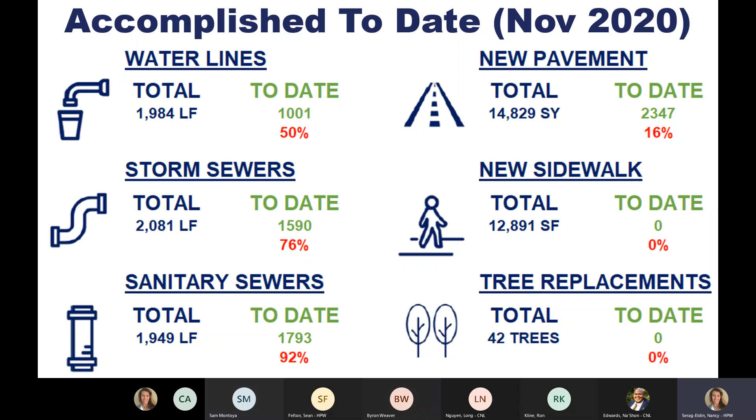As of today, this is what has been accomplished for the 6 major components of this project. 50% of the water line has been installed, 76% of the storm sewer and storm inlet leads have been installed, 92% of the sanitary sewer and sanitary service leads have been completed, and 16% of the new roadway pavement has also been installed.

In terms of payment data, the work completed to date is approximately $2,451,000, which is approximately 42% of the original budget. In terms of time use data, today is day 105, which is 23% of the original contract time. So this project is quite ahead of schedule, which is great.

We've also approved 2 change orders so far, so the budget has increased a little bit. It's now $5,901,000 and some change. And we've added 2 additional days to the contract time, for a total of 452 days.

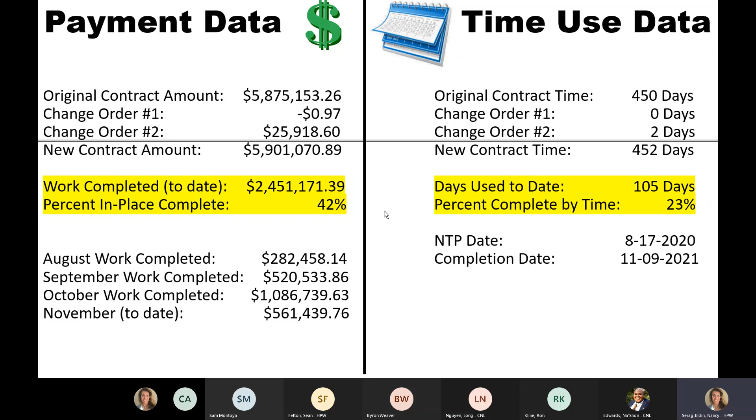So these are the action items from our previous progress meeting. There's just 2 items that I wanted to double check with Sean and Sam. Sean, for action item number 3, are there any updates regarding the sanitary sewer blockage that was on South Wilcrest?

No. I got in touch with the lady from the city, but she never got in touch with me. But Oscar had somebody come out and do some cleaning on his own, specialized maintenance. But that's all that's been done. Okay, thank you for that. Got it, all right.

And then with regards to item number 5, Sam, do you have a rough estimate of when the subcontractors and vendors can resubmit these 5 submittals? Yes, I spoke with Reliable Signal this morning, and they plan to submit by the end of next week. I'm looking at submittal number 49 to recall which one that is, right quick... Okay, that's the same people, and that should submit by the end of next week.

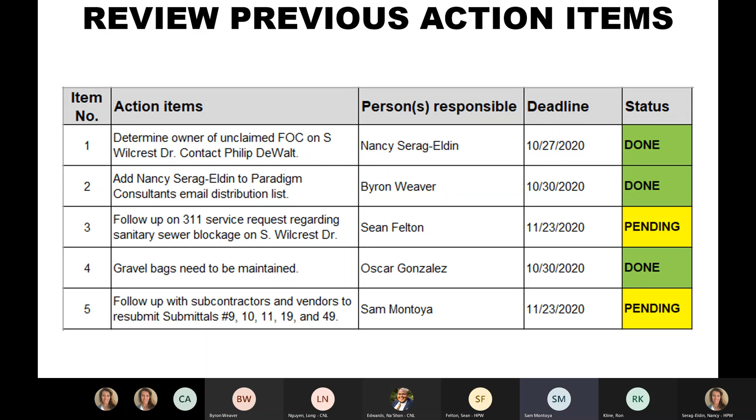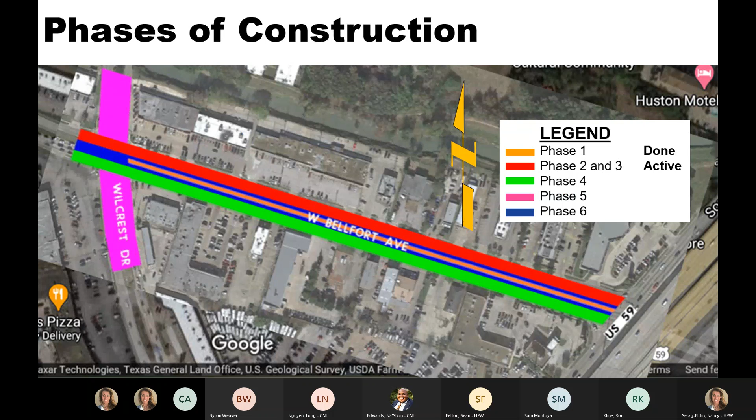Okay, moving on. So, like I said before, we have 6 phases of construction for this project. We're still in phase 2, specifically phase 2B, working on the north side of West Bellfort Avenue, shown here in the red line.

Okay, so the next few slides that I'm going to show will illustrate in more detail where the work has been performed, and a few photographs taken from the job site to illustrate the construction work during the last 30 days in more detail.

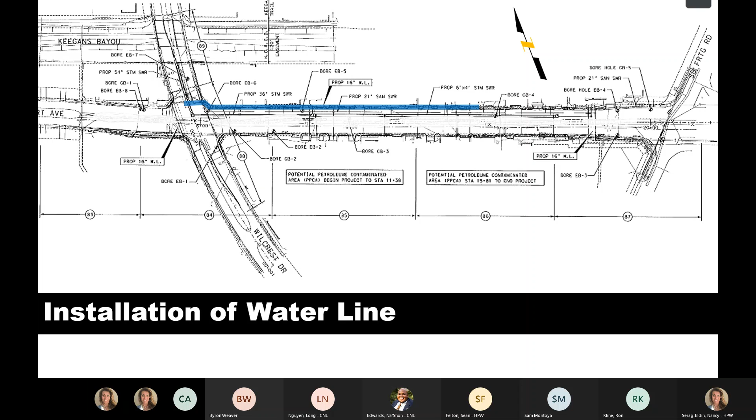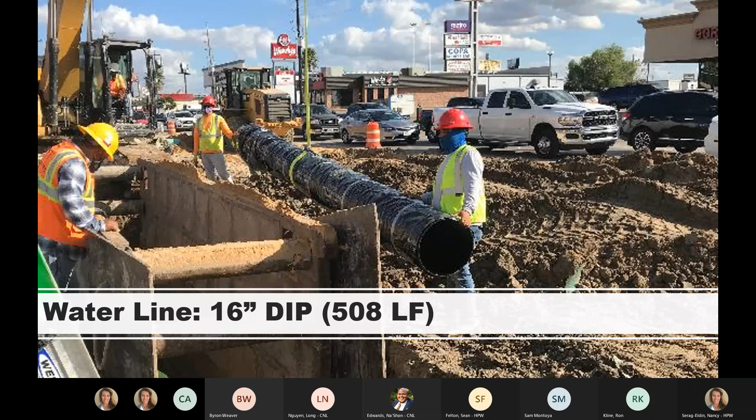So this slide is a plan view of the entire job site, and the blue line shows where the new water line has been installed up through today. The water line progress for the last 30 days includes 508 linear feet of 16-inch ductile iron pipe, 396 linear feet of 16-inch PVC pipe with restrained joints, and 2 fire hydrants.

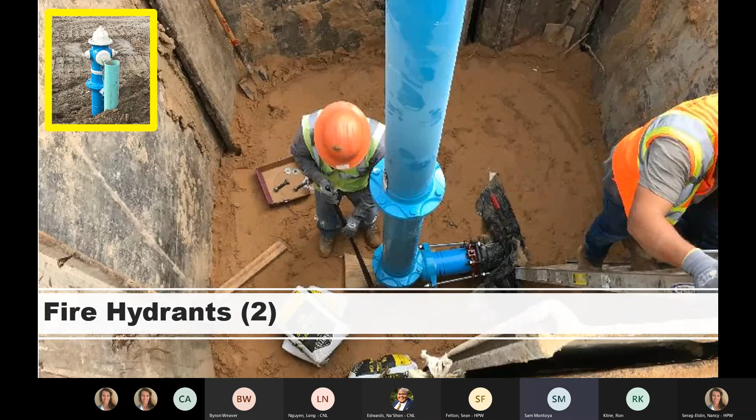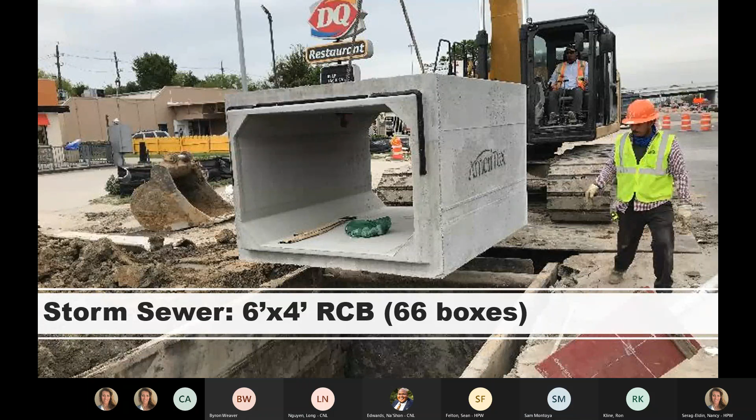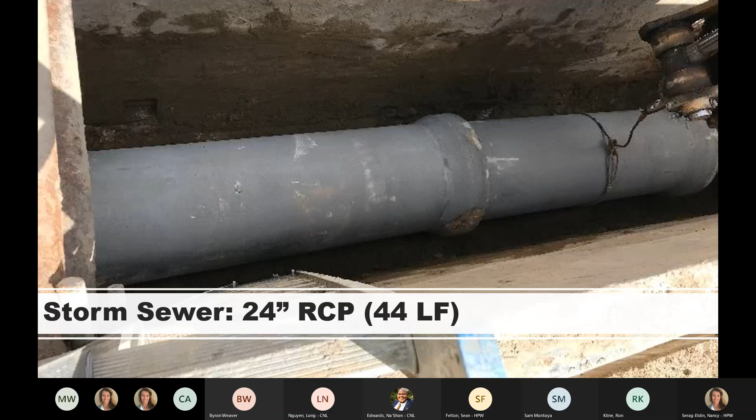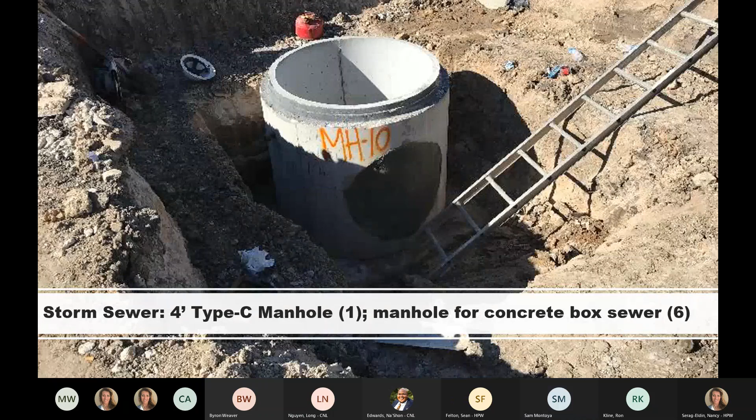Here's the plan again. The green line shown here is where the new storm sewer has been installed up through today. So the storm sewer progress for the last 30 days includes 66 boxes of 6x4 reinforced concrete boxes, 44 linear feet of 24-inch reinforced concrete pipe, 1 junction box, a total of 7 manholes, and 5 inlets.

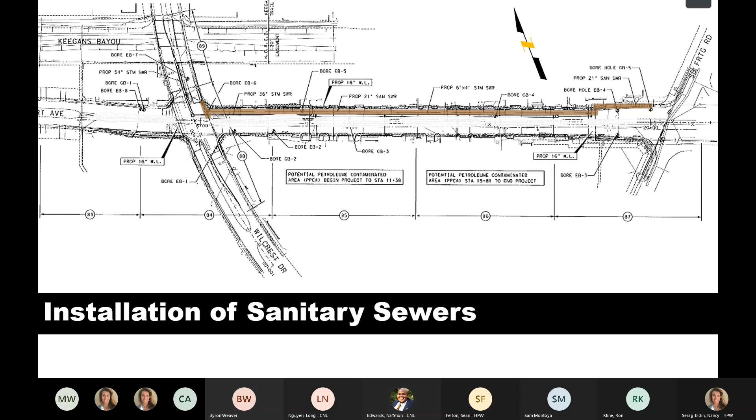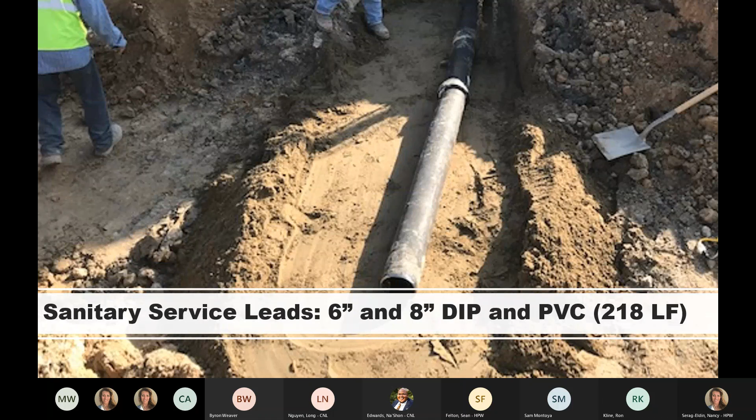All right, back to the plan again. The brown line shows where the new sanitary sewer has been installed up through today. The trunk line is now complete, and currently SER is installing the lateral sanitary service leads that will connect the main sewer line to each business property. So the sanitary sewer progress for the last 30 days includes 244 linear feet of ductile iron pipe, 218 linear feet of a combination of 6-inch and 8-inch PVC and DIP pipe used for the lateral service leads, and it also included 2 manholes, but I couldn't find a photo.

All right, the last section is about the pavement. So this gray shaded area is where new concrete roadway pavement has been installed up to today. The yellow shaded area is a new construction driveway.

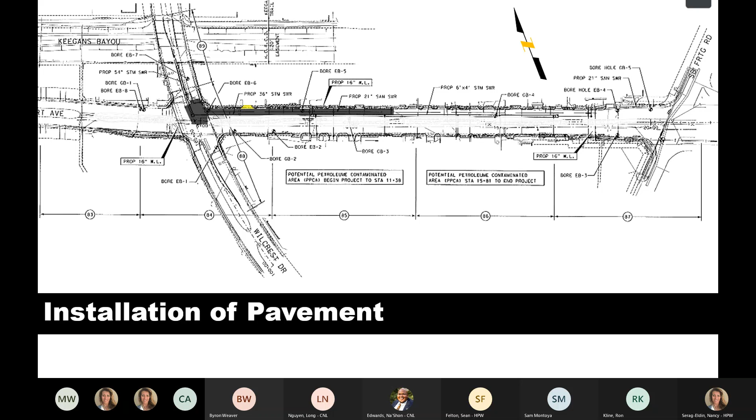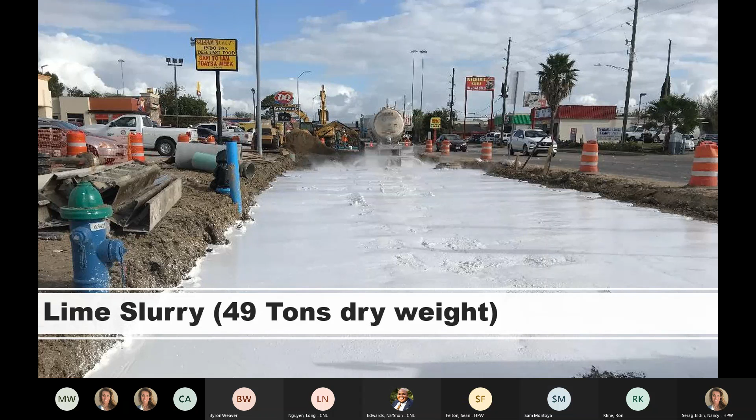So the concrete pavement process included the following activities: placing a lime slurry mixture to stabilize the subgrade, mixing the lime stabilized subgrade, setting up the forms and placing steel reinforcement, and finally pouring the concrete, which has typically been performed at night or in early hours of the day before dawn.

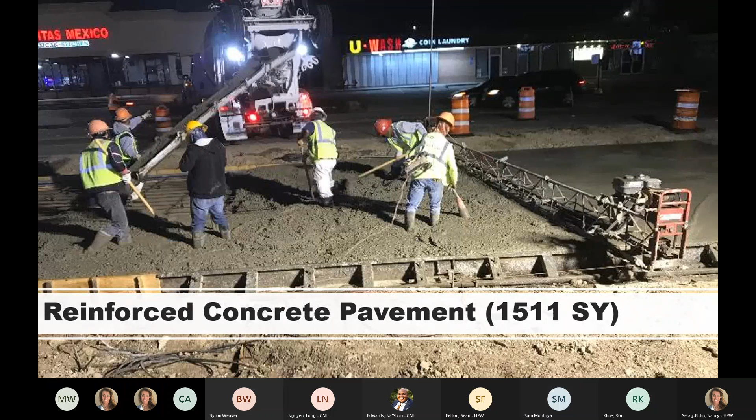All right. Okay, I'm now going to hand it over to Sam and Oscar to discuss any other current work progress that I might have missed and any issues that they encountered during the last month.

Okay, Oscar had a previous engagement and was not able to be in the meeting, so I'll just take this. As you said, Nancy, we are currently in phase 2B, and we will remain in 2B for the remainder of the month. With the holiday season and potential weather, we feel like we'll be in phase 2B a month to a month and a half. Depends on obviously weather also.

Current issues, there's a lot going on. We seem to have found some services that weren't identified, but we've worked through those issues. We've worked through some sign issues, you're aware of all those. We're continuing in the phase and moving to the east. That's the current work in progress, phase 2B.

Excellent. All right, wonderful. Thank you. Hey, Sam. Yes, sir. How did that drainage work?

So we had a lot of rain, I guess it was Saturday night. So no issues, no problems? Well, I haven't been informed of any issues that we've had. Sean may have a view that I don't have, and also Oscar isn't here, but I haven't heard of any problems. Sean, have you heard of anything? No, I haven't heard of anything. Excellent. No news is good news sometimes. Exactly. Got it. You're right there.

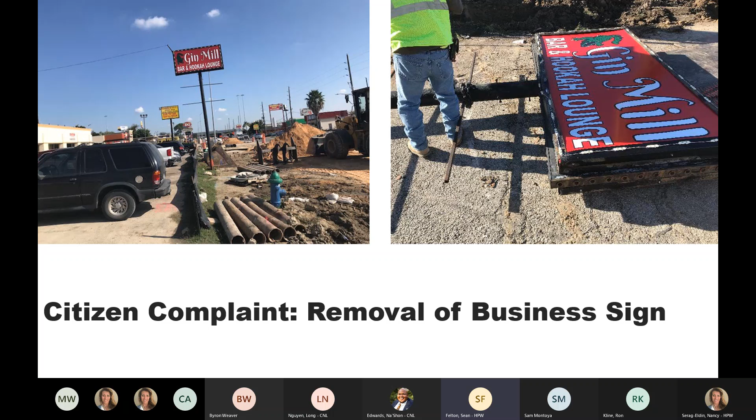Moving on, submittal schedule and status of submittals. We already touched on this at the beginning when we went over action items. These are the 5 submittals we still need to resubmit. You said you're going to follow up with Reliable for submittal number 10, traffic construction.

Are they also related to 9 and 11? I'm not sure, but they're all associated with Reliable Signal. Okay, I gotcha, so all of those. All right, cool, thank you.

Nancy, if I may go back one step since we're close here. The advisory notice, I was told to send that to Claudius, so I did respond to it. Did you get that, Claudius? Yes, I had. Okay, good.

All right, I think we're fine. I think it was just a breakdown in communication maybe. I was told to send it directly to him. Well, you're okay, Sam, I got it. No problem about it, I got it. Thank you, okay good, you're okay Sam. All right, cool.

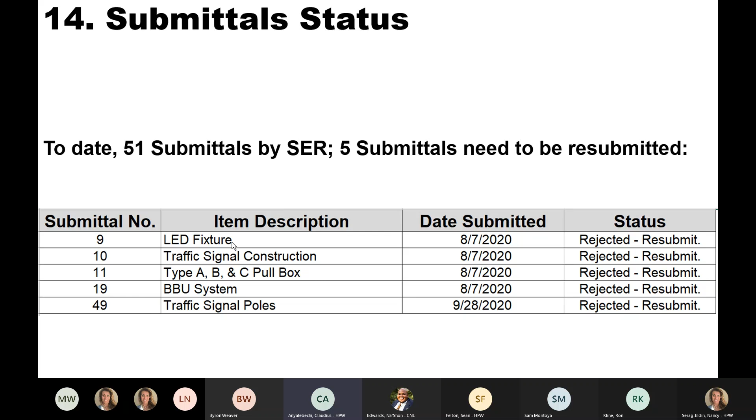Moving on, status of RFIs, RFPs, and change orders. I have a couple slides on this. These are the RFIs we have for the month of November. I put a short description for each. There's only one that's still pending.

Ron, do you have an idea of when we'll have an answer to RFI number 14? Well, RFI 14 is kind of tied to submittal 49, it's locations of the signal poles and the signal heads. So once Sam gets back with me, I'll respond back. Otherwise, I'm going to respond back in a general form. Okay, gotcha, all right.

Sam, you're going to go out. I know you guys field measured and laid out the signal pole and measured over for the signal heads. Correct, and that is correct about the submittal. We should get those by the end of next week. Right, we'll tie it up all in one. Okay, good, all right, good, good.

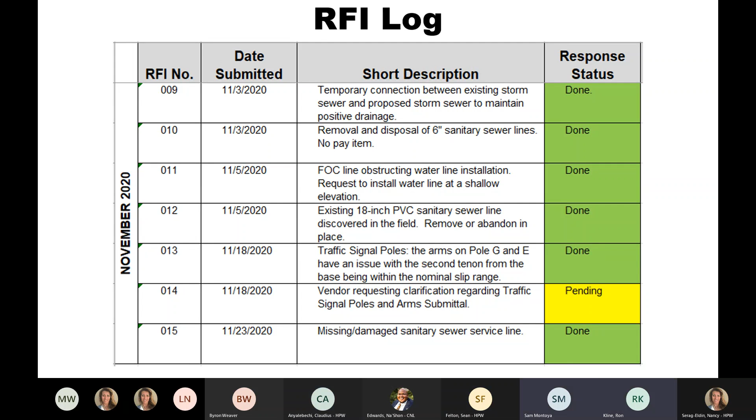The next slide, I put together a table showing any and all contract modifications for this project. In the order they're done, we start with the RFIs, then a work change directive if needed, then an RFP if required, and then the change order.

So far we have 2 change orders that have been completed. These are the RFIs related to them. This one required change order number 1, and this one had a proposal for a new pay item. So those are the 2 change orders we've completed.

We have 3 more change orders in the works, but they're still pending. I still need to issue those. This one is related to the backfilling using cement stabilized sand, and this one is about the cement stabilized sand as well.

This one was about the temporary connections we need to do to maintain positive drainage from existing storm sewers to proposed storm sewers. This one is about backfilling with CS sand. And the final one is about additional sanitary service leads that were discovered in the field. So those are the 3 change orders coming up in the future.

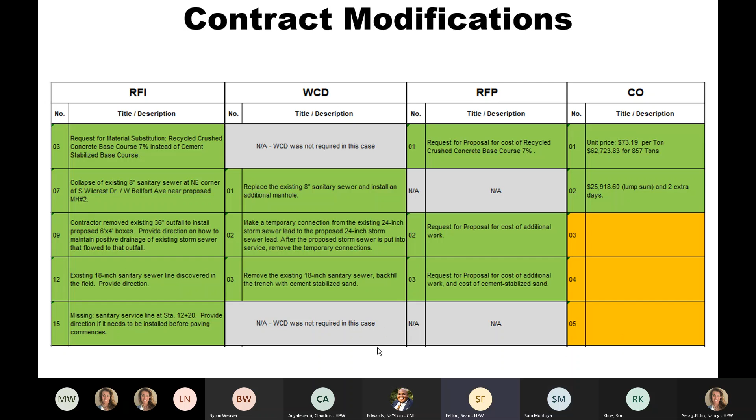I guess not. Okay, actual or potential claims. Anybody?

I don't have a claim, but I have a question. The northeast parcel there at the Speedy Cash. There was a question, we have right of entry, but we don't have clearance to redo the driveway. We didn't used to. What is the status now?

Hey Sam, which driveway are you talking about? Right there at Speedy Cash, on the Wilcrest side, on the northeast corner. That driveway is supposed to be closed, right? Correct, it is closed. And I'm wondering if we're going to have the ability to reconstruct that in time.

Okay, let me give you the update on the parcel. This settlement price was determined last month. So the city legal department, along with municipal courts, is setting up an account, which should be done mid-January. Once that account is set up, that allows the property owner to draw from it. But once the account is set, the parcel is ours. The attorney advised it would be secured by the middle of January.

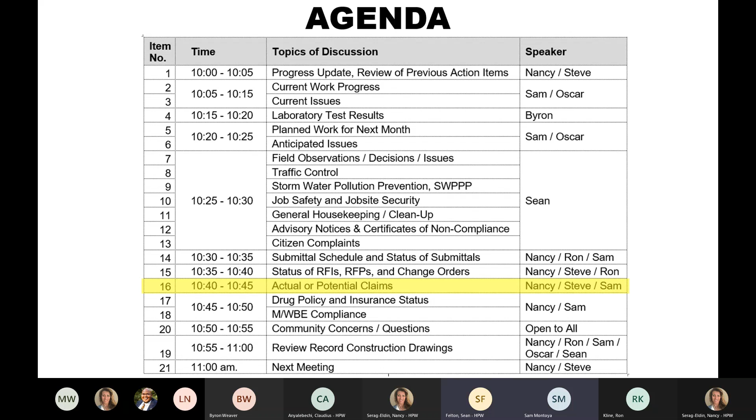Okay, drug policy and insurance and MWBE. So we're good, our policies aren't due until March, at the end of March next year. And for the insurance, it's going to be June of next year. So we're fine there. MWBE compliance, as you remember from last time, our project goal is 18% of the contract value, which equals a little over $1 million.

By the end of October, SER had reached 9.84%, so they're over halfway to the project goal, and the project isn't even half done, so this is great progress. I still don't have the numbers yet for November. At the end of the month, I'll have those. Okay, so I guess today is the end of the month, so maybe we'll have those sometime this week. I should have the updated report by tomorrow. Okay, sounds good.

All right, does anybody have any questions or comments, or anybody from District F want to raise any community concerns?

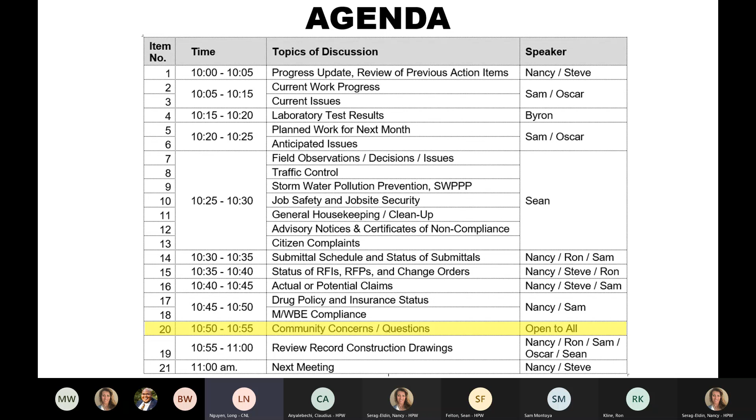None, but thank you so much for everyone's comments and inputs. And the thing about Speedy Cash, I wasn't even aware of that, so it's great to know more about that. I'm going to report back to Councilmember Thomas, because she specifically asked about communication with businesses. So thank you guys, appreciate it.